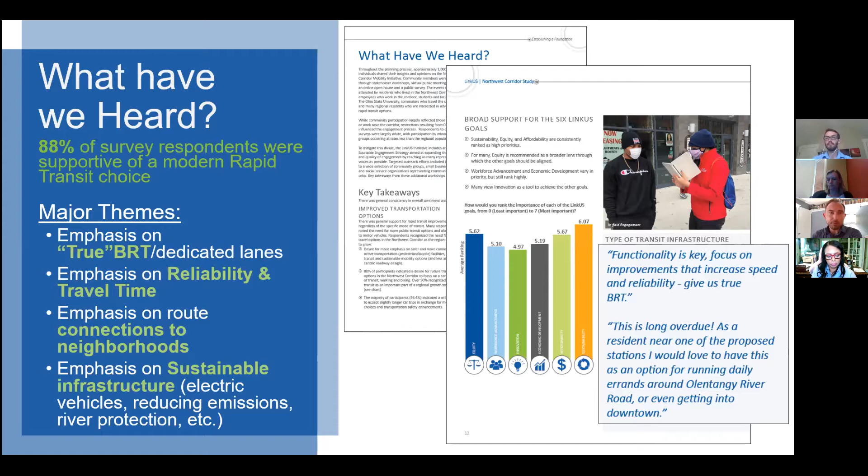So through our last round of public engagement, a big piece of that, of course, was analyzing different alignment alternatives for BRT through the corridor. We've broken the corridor up into two main sections. Again, this is the southernmost portion of an overall corridor that ultimately would go further northwest, presumed to terminate in Dublin. We've been focusing on a downtown to Bethel Road connection for this first phase of work.

What we've heard is general support for the Olentangy River Road alignment, essentially the existing alignment of the roadway. It's the most direct. It would have the best travel time for transit through this section of the corridor.

But a mixture of support for the variety of options that we've explored for the downtown connection from Goodale into downtown, connections that could go directly to the Arena District, options that would go directly to Broad Street in Franklinton. In any scenario, there would be an intersection of the east, west, and northwest corridors. It's just a matter of where that makes the most sense to happen.

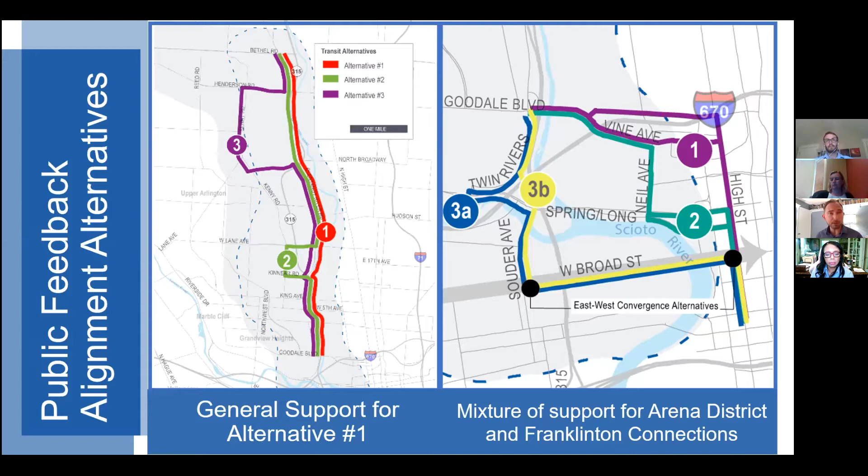So where we've arrived is proceeding with recommending alternative one, the Olentangy River Road alignment from Goodale to Bethel. This provides great opportunities to integrate with OSU's CABS systems. I see we have Kim Moss, part of the project team here as well. That's in keeping with recommendations of OSU's transportation and parking plan, and providing those really enhanced east-west connections between a north-south BRT alignment and everything that's going on at West Campus and the new development there and main campus.

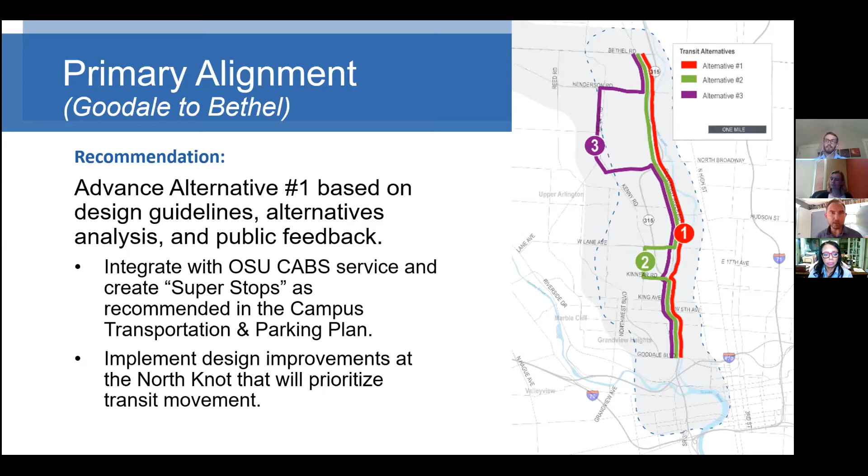And then opportunities as we proceed in a next design phase to really explore what happens at that north knot jog in Olentangy River Road underneath 315.

In terms of the downtown connection, based largely on the feedback we've heard and that mixture of desire to hit multiple destinations, we've explored and are recommending pursuing a hybrid alignment of some of the alignments we originally looked at. That resulted in what we're calling alignment 4, a hybrid of alignments 2 and 3. Alignment 2 was directly serving the Arena District. Alignment 3 would make the connection down Souder Avenue to Franklinton, to West Broad Street.

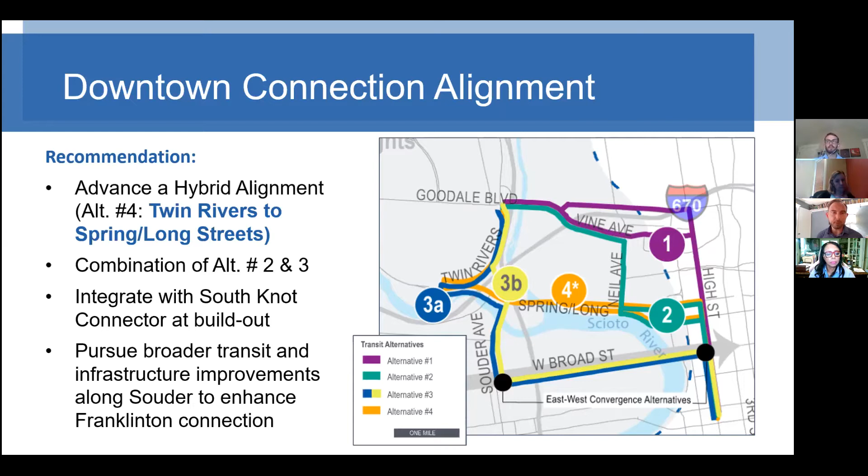There's an opportunity to integrate this with more substantial long-term improvements for a more direct connection through this South Knot area, the interchange at 670 and 315 and Dublin Road. Also opportunities to continue to explore enhanced connections between the east-west and northwest corridors along Souder Avenue.

What that looks like in full is this recommended alignment: Bethel Road, down through the South Knot area, Twin Rivers to Dublin Road, Spring and Long Streets into downtown.

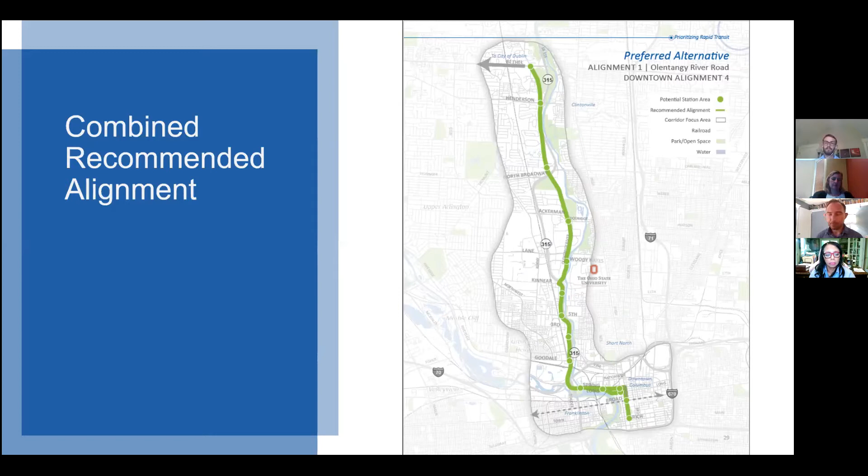As we explore this, we're thinking about how this all fits together as part of this larger system, integrating with the east-west corridor as that unfolds, a project moving very quickly, led by Zach and COTA. Zach's going to walk us through more of how we're thinking about these interconnections and how the east-west and northwest corridors along this recommended alignment can complement one another.

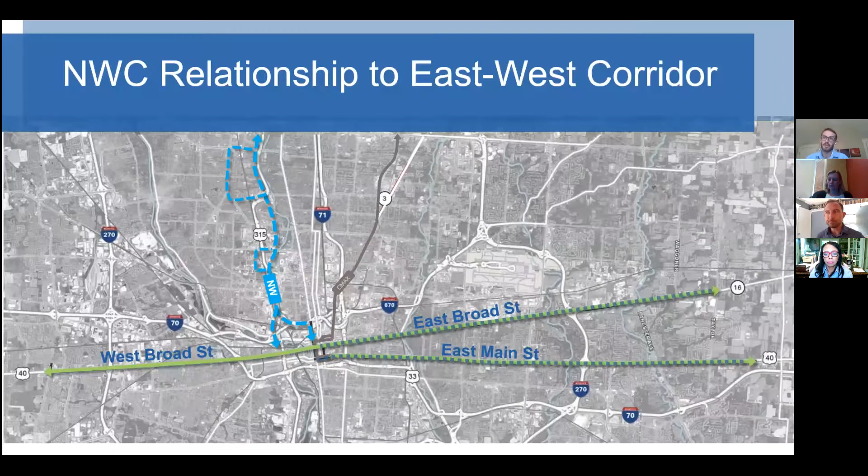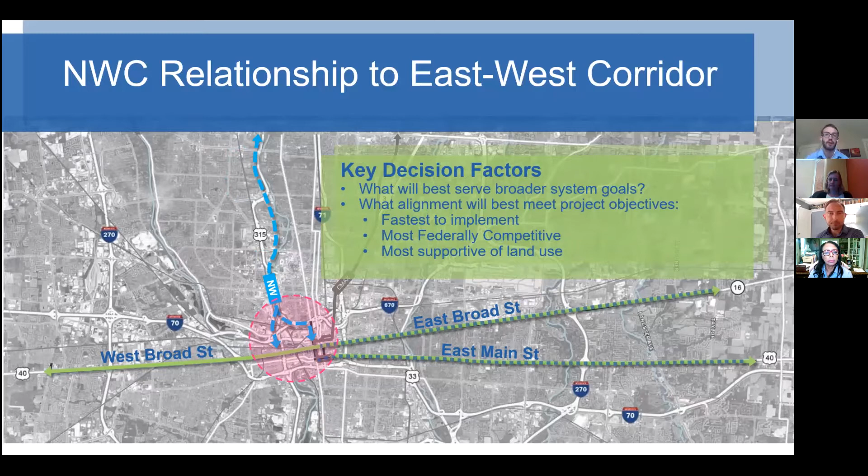Thanks, Justin. So like Justin said, we wanted to look at a holistic approach for the entire LinkUS network, future corridors, and the east-west corridor. Additionally, COTA's current network predominantly is still centered around the downtown area with a lot of transfer opportunities, and the CMAX along Cleveland Avenue, our light BRT in the region that operates along High Street downtown. So really, we want to look at what's fastest to implement, most federally competitive, and most supportive of existing and future land uses.

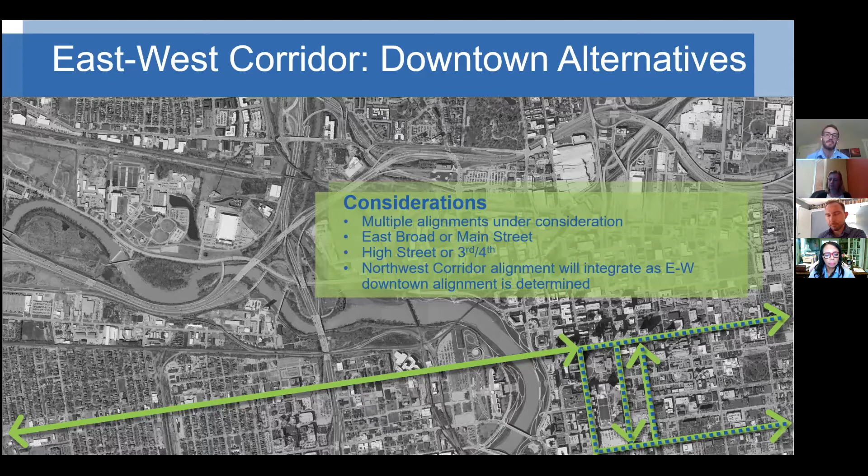As Justin said, we had these initial three different options that we looked at, two of them primarily in the Arena District, one similar to what Line 3 and Line 8 currently operate, and then one connection down to Souder. Really out of the public process and stakeholder engagement, a new alignment, option 4, is most direct to downtown, could also be fastest to implement, as well as supporting existing and future land use.

On the map here, you see the east-west corridor, as Justin mentioned, is a parallel project going on right now. We actually had a public meeting last night to talk about some of those elements for the east-west corridor. On the east side, between East Main Street and East Broad Street, we need to determine what is most feasible to be directly tied into West Broad Street. If it is East Main Street, then there'll have to be a connection downtown, either on 3rd and 4th or High Street. So we wanted to take that into consideration for the Northwest Corridor, which really solidified this alignment.

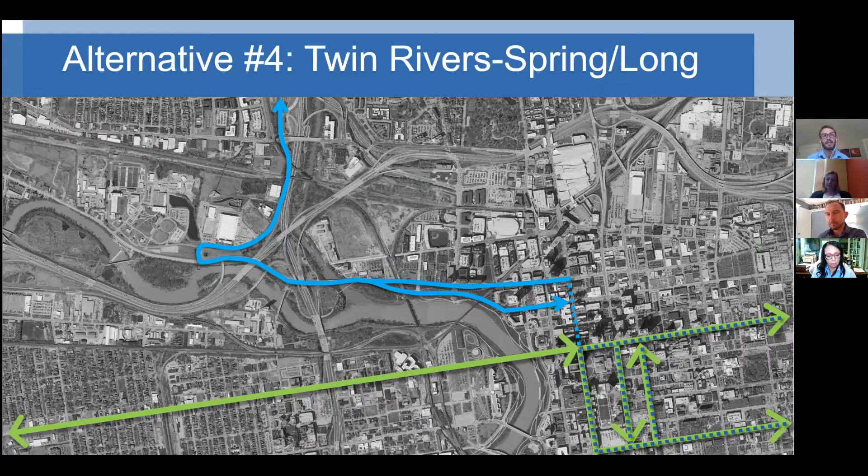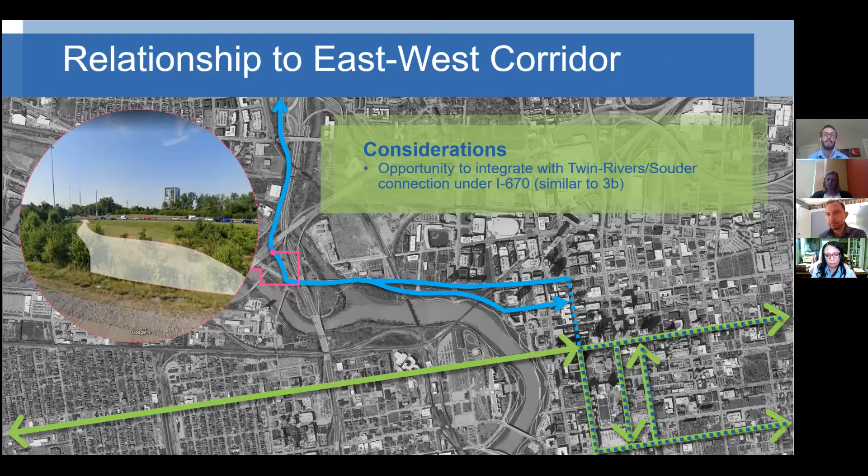Right now we're kind of bending around the existing Twin Rivers, but also looking at that interchange and seeing if there could be potential modifications for transit vehicles to punch through, to make it more direct than it is currently today. Other things we looked at were the right-of-way and existing lane configurations.

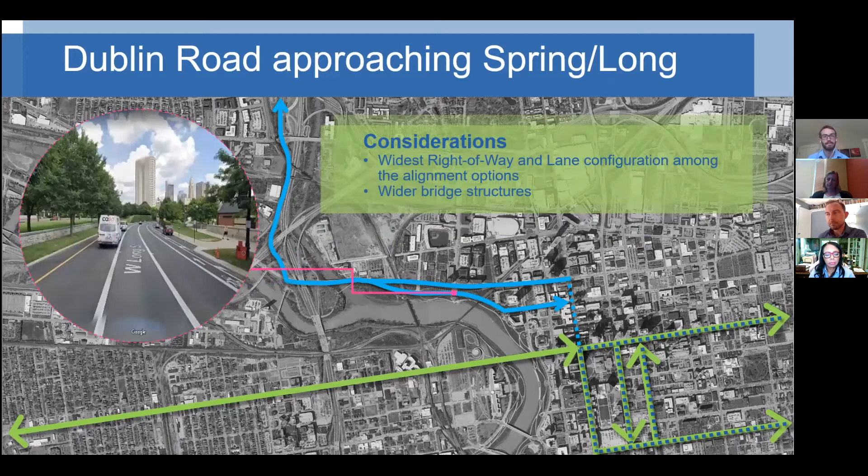Along Spring and Long Street currently, there is a lot of space that can be utilized for that transit dedication. We also really wanted to make sure we're not duplicating what the East-West corridor and the Northwest corridor are doing, so we're looking at this with a holistic approach.

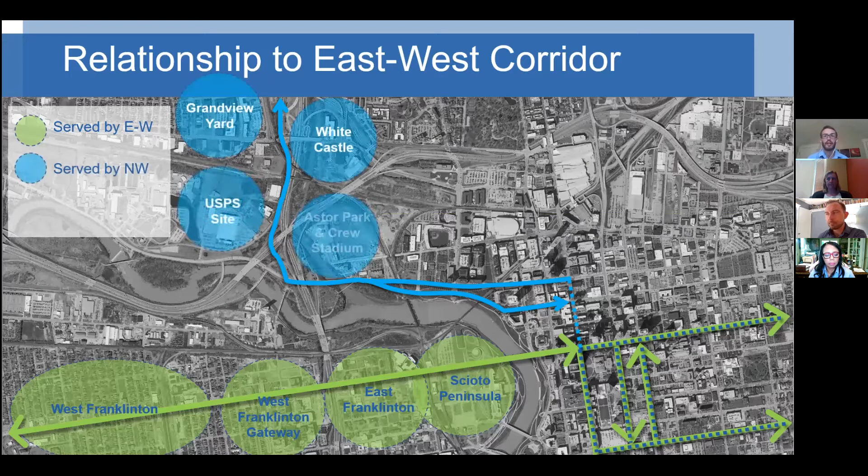With the East-West corridor, it'll go through Franklinton, parts of the Scioto Peninsula, and then connect downtown to the east side. The Northwest corridor covers Grandview Yard and Grandview Heights, the USPS site, and all the development happening at Astor Park, which is the Crew Stadium, and also touching the Arena District. It also covers CoverMyMeds in between both of those, with that new campus there.

We also highlight here that Columbus Parks and Rec are constructing a new trail bridge across the Scioto River that will solidify that connection and make it even easier.

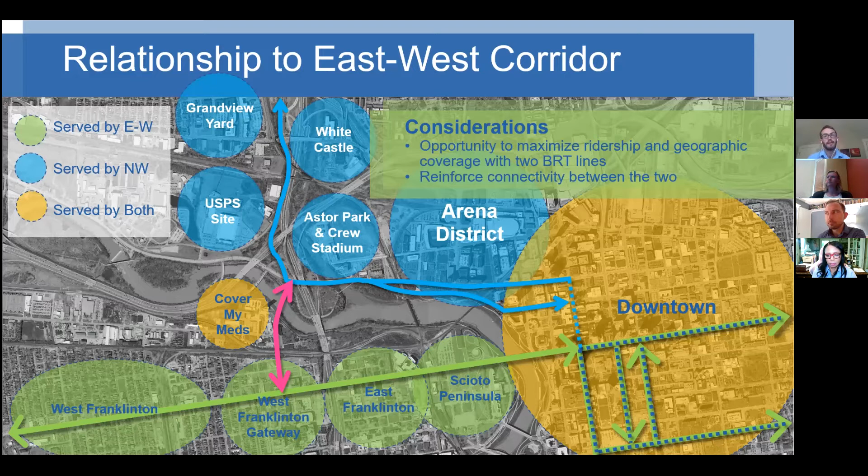That recommended alignment will be presented in more detail in the summary report and overview, covering technical evaluation and public engagement. In addition to the summary report, we'll be publishing detailed technical memoranda providing evaluation results and analysis of quantitative metrics. All of that will be coming online soon.

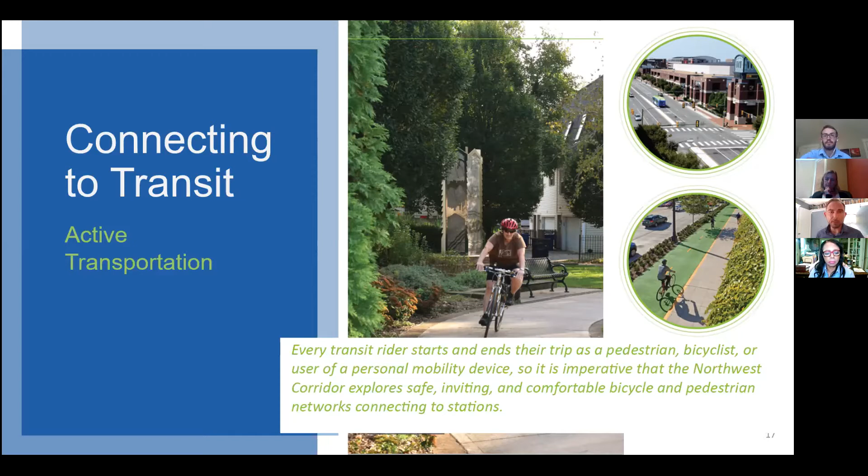Another important element of this summary report for phase one are recommendations around active transportation connections into the recommended BRT alignment, because most transit users are either pedestrians or using a bicycle or some other personal mobility device. Enhancing those interconnections between modes is critical to the success of the corridor.

We have a number of barriers, whether it's bridge crossings of the Olentangy River or the Scioto River, on the south side, or 315 itself, or even Olentangy River Road or the CSX Railroad. So this is a lot of different potential projects. Part of the next phase of work will be refining priority connections based on refined transit station locations.

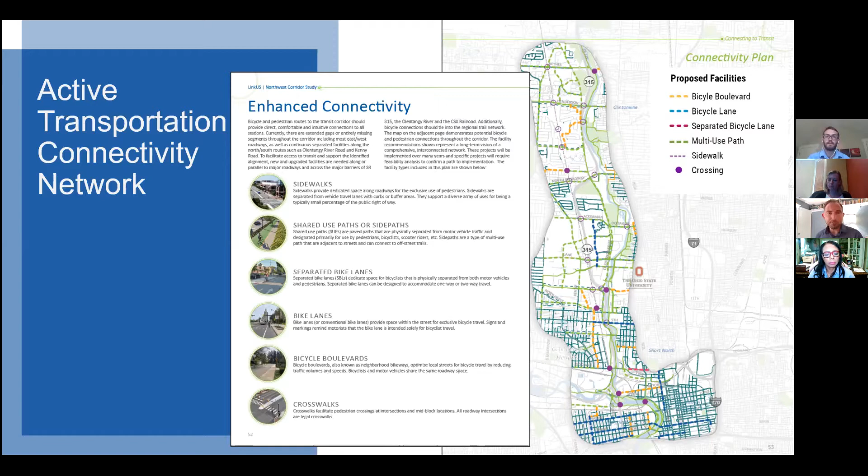The summary document also includes a series of transit supportive and transit oriented development principles. One of the key ingredients of success here is building a really transit supportive development environment, providing that compact, walkable development pattern so that people living or working in the corridor are in close proximity to transit stations.

There are a number of development opportunities throughout this corridor, and those need to be leveraged in conjunction with implementing a BRT to make sure we're providing that alternative mode of transportation to alleviate congestion and traffic concerns with new denser development, but also providing the denser development that creates the ridership needed for a successful transit corridor.

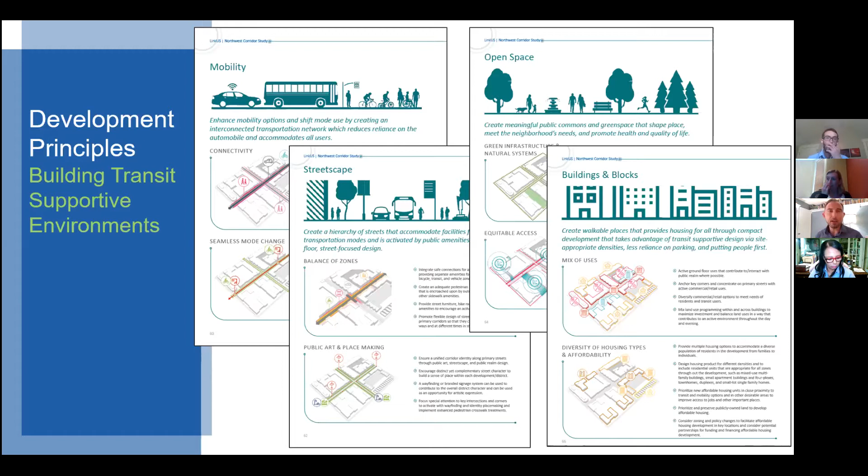So there are a long series of transit supportive design guidelines appearing in this document that you'll be able to see in much more detail once you have the document in hand, as well as some illustrative development concepts at potential opportunity sites at different locations along the corridor.

There's an example here in the Ohio Health headquarters campus area, with some recent development happening there over the past few years - a great development opportunity at that location. Others featured include the Lennox Town Center area, the Bethel Olentangy Plaza Shopping Center, and other locations up and down the corridor.

I want to emphasize what's on the slide here - these are all very illustrative. They're not specific proposed development plans. Development will emerge through partnership with private property owners and based on zoning regulations in place at the time development happens. But this is painting a picture of how we can integrate development patterns with the transit and other mobility investments in the corridor.

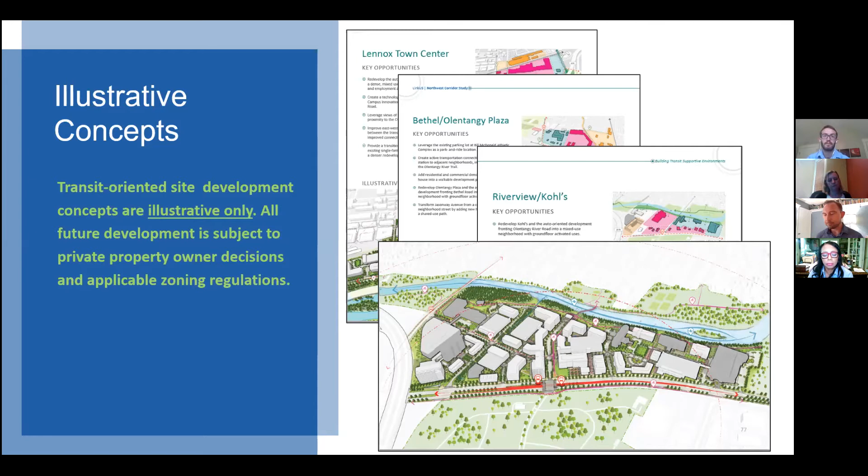So that brings us to next steps. The action plan includes a long matrix of next step recommendations in this document. Some key ones we're highlighting here are taking this plan and advancing it into the next phase of implementation - getting the BRT project into a design phase and advancing it into the Federal Transit Administration's project development pipeline for a capital investment grant.

As we're refining station locations, that will help us prioritize key first mile, last mile multimodal connections into station locations. Also advancing the development intent and principles, and coordinating on the City of Columbus side with our zoning code update, which the Department of Development and Building and Zoning Services is in the first phase of right now - making sure that as that update happens, we're building the right development guidelines into actual zoning regulations to create that transit supported development environment.

That will include public-private partnerships with specific development opportunities as they emerge. Also studying the long-term build-out connection of the overall corridor. As noted earlier, prior studies at a high level have looked at a connection ultimately to Dublin, going back to COTA's NextGen plan and corridor concepts, which is really the precursor to this effort.

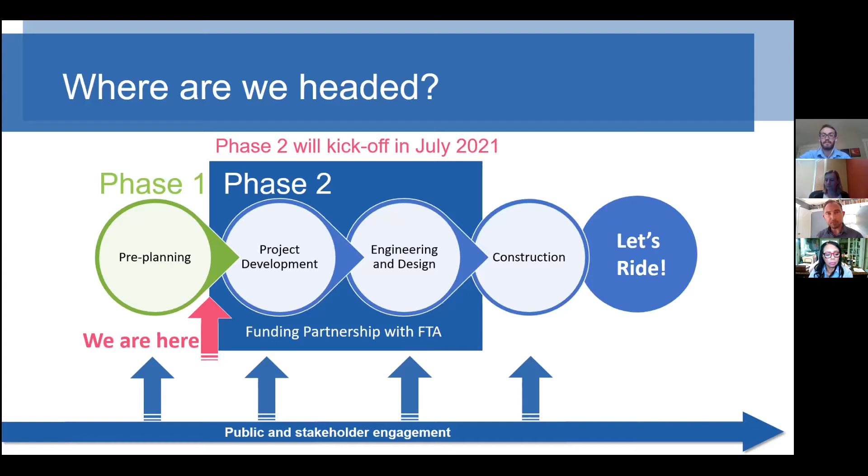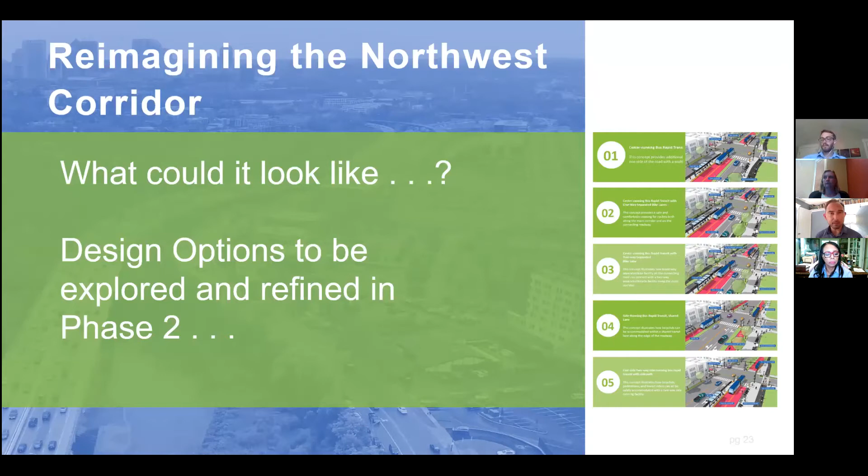So the last thing we want to share with you here, featured in our summary report, are some illustrations of what BRT in the Northwest Corridor could look like. Again, these are conceptual, to be analyzed in much more detail in the design phase we're about to enter, but to give a flavor of what dedicated transit guideway in different configurations, whether that's center running BRT or perhaps side running, but in that dedicated space and integrated with enhanced pedestrian and bicycle connections, whether those are on street or off street.

A critical thing about this corridor, in fact any of the corridors that will get advanced through this program, is the context changes pretty greatly as you move through the corridor today, and it will always be different at different sections along the way, especially as new development opportunities happen. So the right-of-way design will need to respond to those changes in context as well. So we're developing a series of different options. It's not going to be a one-size-fits-all design necessarily. Again, all of this will be explored in much more detail as we move forward into the next phase of work.

We talked about, I guess, a two-parter I'm interested in your general take on. We talked about median versus curbside entry for these buses, and they talked about how, which was very counterintuitive to me, that the median is actually safer for passengers.

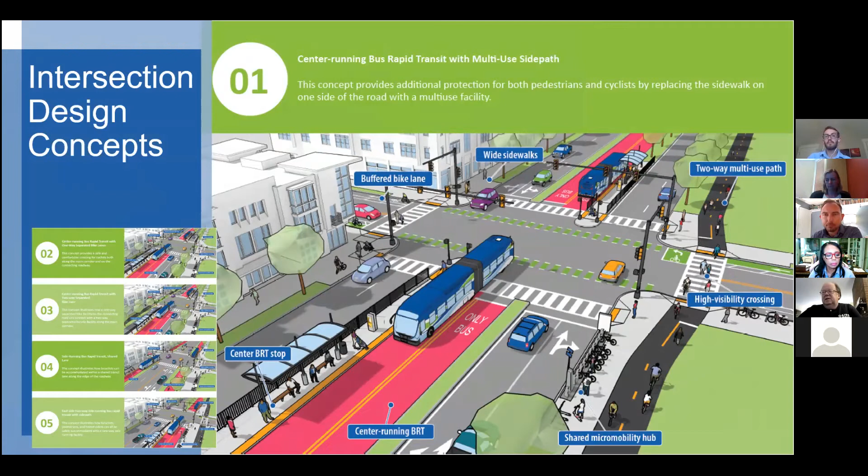Curbside doesn't force people to do that. So that's my first question, because that's very counterintuitive when you think about people trying to run across a couple of busy lanes to catch a bus they might be late for. Maybe you could walk me through why that could be safer. And then the second question is, how much, realistically, ballpark it, how much of this corridor do you think could be dedicated public right of way for BRT? Dedicated transit guideway, versus mixed traffic sort of BRT.

That's a very good question. I hate to keep saying that'll get confirmed in the next phase, but that is the case. We have a general goal of as much dedicated transit guideway as possible, as is feasible, and based on cost-benefit analysis as well. We should not assume absolute 100% dedicated guideway, but certainly more than 50%. If you look at most true BRT projects around the country with dedicated guideway, they essentially all have some elements of mixed traffic at pinch point locations where it just hasn't been feasible. But the goal is as much as possible. So that will get determined in the design phase we're moving into next.

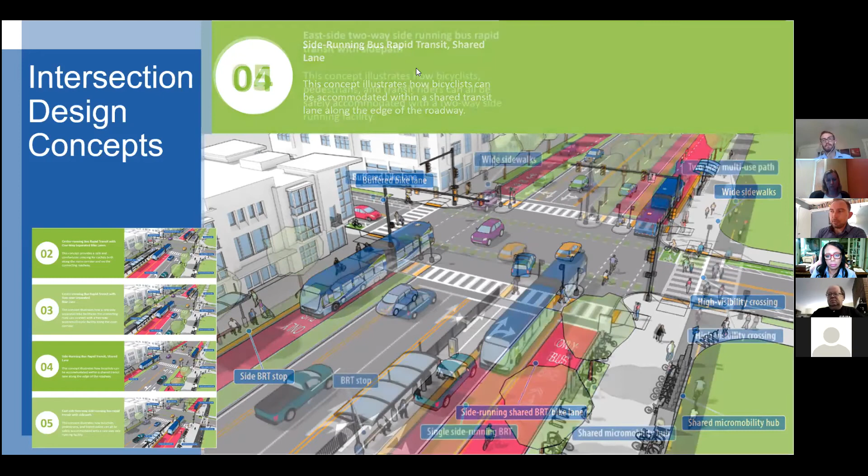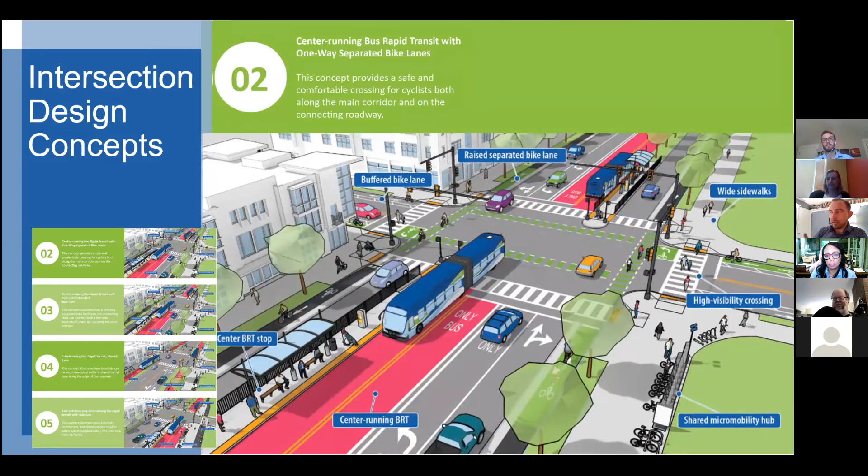In terms of your other question, Brian, with regard to pedestrians crossing and safety with median guideway, here's an option for curbside, and then different configurations of this would be center running, median, curbside with median dividers — a few different operational scenarios of how that guideway could fit in the corridor. One consideration around a center running guideway is you're introducing a barrier between opposing lanes of traffic, and that can have a traffic calming effect for regular vehicular traffic.

You're also providing a shorter pedestrian crossing distance to the station. If you think about somebody who may need to access the BRT, depending on what direction you're going, you may have to cross the entire roadway depending on what side you're starting on from your original destination.

The center running does have the potential to provide a pedestrian refuge, coordinated at a signalized location, adding things like a pedestrian lead interval to prioritize the safety of pedestrians getting to the station without having to run. So understand that may be counterintuitive, but there are some benefits, and that'll all be explored in the next design phase.

But again, it's not guaranteed as center running. Per my point earlier, the context and the right-of-way configuration will change. We may see multiple versions of these different options at different points along the corridor. Additionally, the makeup of the corridor has a lot of areas where there's development on one side of the street, so center running might not make the most sense in those specific areas.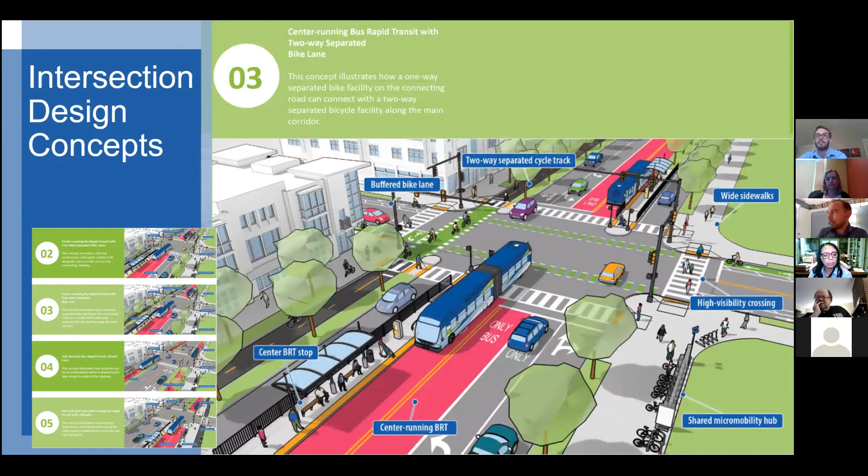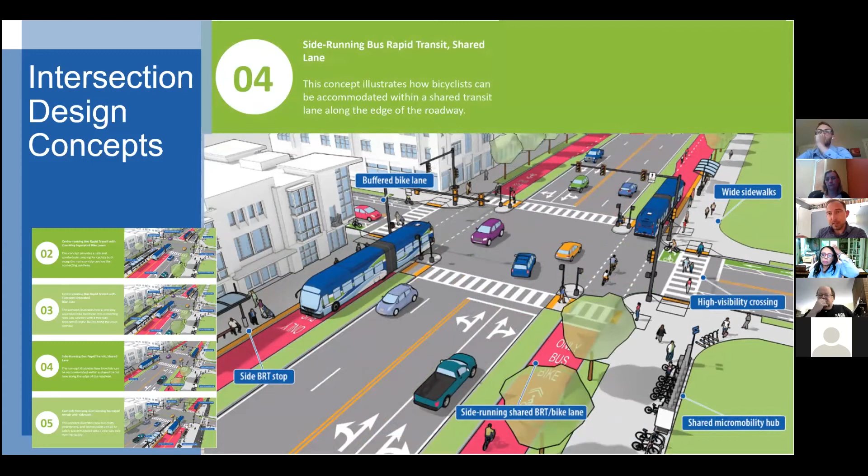It's maybe a little hard to see, but one of these options does include, in some locations, a wider BRT lane that could integrate dedicated bicycle space with minimal mixing at those station locations where everything's moving slowly at a signalized location. So there's lots of different ways that could play out.

Brian, you're absolutely right. A lot of what will have to be dealt with through the design process is exploring trade-offs based on right-of-way constraints, cost impacts, and traffic impacts. We didn't include it in this slide deck, but in the summary report there's a matrix of design considerations and priorities in different contexts, whether along the primary BRT route where we want to prioritize transit movement and pedestrian and bicycle access, versus other things like parking. We don't have on-street parking on Olentangy River Road today, but maybe some east-west connections with new development could prioritize that more than the transit priority corridor. So there's a high-level prioritization we're laying out as guidelines, which will feed into a more detailed trade-offs analysis through design feasibility.

Matt, you have your hand up.

Thanks, I appreciate it. It took me a few minutes to figure out where to raise my hand, so one of my questions was already asked. I have two separate questions, but I really appreciate the presentation, these graphics are fantastic, very helpful. Thinking of the long range game here, this is a very urban example, right? Yep, the entire corridor isn't urbanized like that today. It may, however, make progress by the time the BRT line is installed.

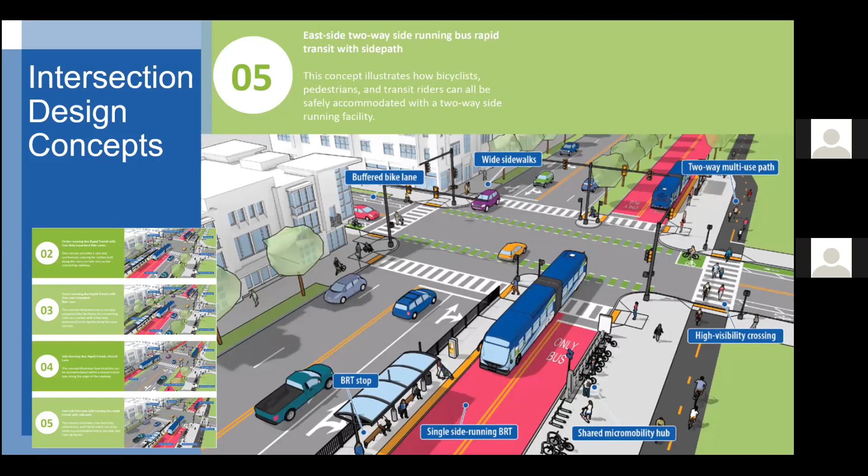In addition to that, I do want to add, we do have some visually impaired groups that have come to our COTA public meetings before. So perhaps that's a group we need to get in touch with to see how some of these elements could be altered to make sure that they can use it. So thanks for that comment.

Is that the group that meets quarterly at 33 North High but doesn't meet right now? I'm not sure, I'll look into that though.

That fits right into Gail's earlier point about equity as a priority, and certainly equitable engagement. We've all been limited by our engagement opportunities over the past year. But as we get into design, we need to engage those specific populations that have specific needs to make sure we're building that into the design, and we're going to prioritize that for sure.